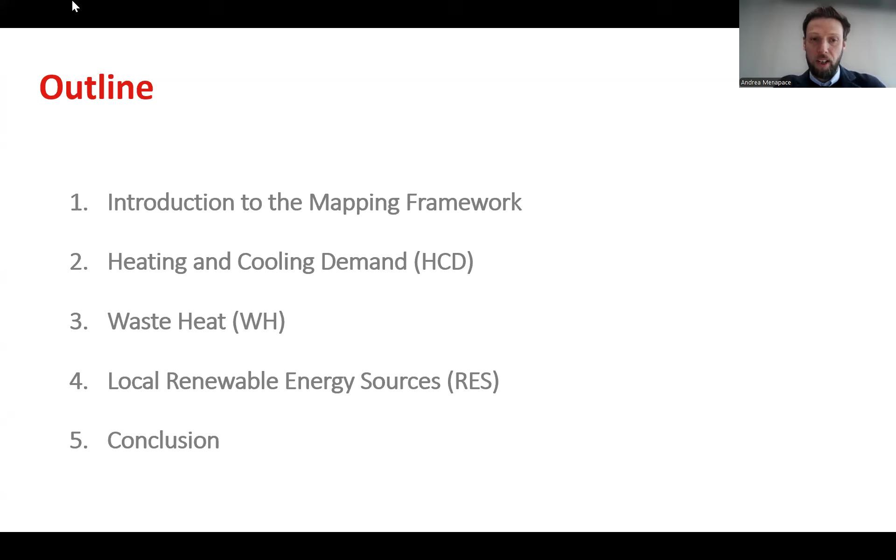Here we can see the outline of today's presentation. I will start with the context and motivation behind this framework, and introduce the overall structure of the tool. After that, I will move to the three core layers: heating and cooling demand, waste heat, and local renewable energy sources. Finally, I will summarize the main findings of the proposed mapping framework in the conclusion.

So let's start with a bit of context. District heating and cooling systems in Europe are undergoing a structural transformation. Under the revised Energy Efficiency Directive, we know that the definition of efficient district heating and cooling is progressively evolving according to an already defined path. In the short term, high efficient cogeneration plays a central role in meeting these efficiency targets. However, the regulatory trajectory is clearly shifting.

While combined heat and power remains relevant in the transition phase, the long-term targets increasingly prioritize renewable energy and waste heat integration. In fact, after 2040, high efficient cogeneration no longer counts as a standalone requirement, and compliance is primarily driven by renewable sources and recovered energy. This means that heating and cooling systems must progressively move from fossil and CHP supporting configurations towards supply structures dominated by renewable energy and waste heat.

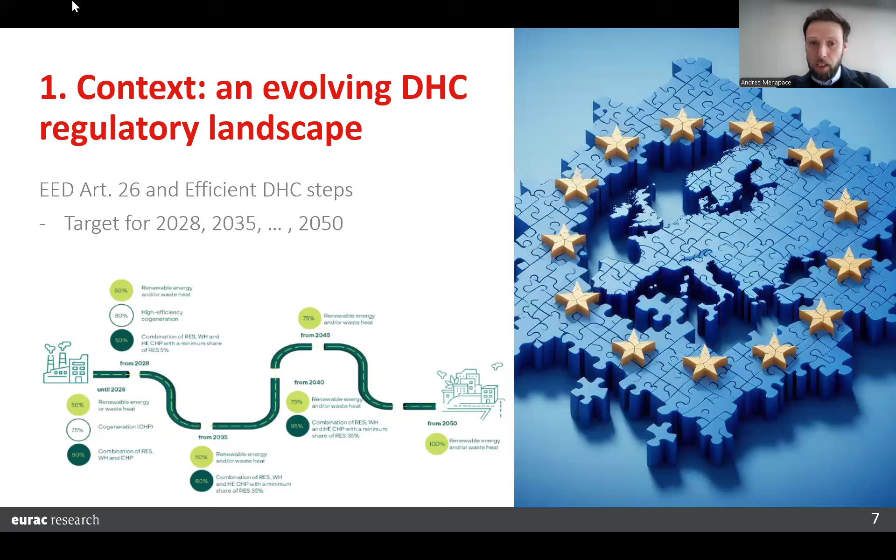This structural shift requires forward-looking and strategic planning, and this is the context in which the mapping framework has been developed.

These regulatory and strategic challenges are the main drivers behind the proposed framework. At the core, there is growing regulatory pressure to comply with the revised Energy Efficiency Directive, as previously said, and the Renewable Energy Directive too. Meeting these requirements is not only a matter of adapting a few parameters, it means addressing increasing technical and operational challenges as systems must progressively reach high efficiency and renewable energy thresholds.

At the same time, cities and operators are required to move towards strategic urban heating and cooling decarbonization planning. This implies a comprehensive transformation, meaning modernizing networks, integrating renewable energy and waste heat, improving production efficiency, and in many cases, expanding the network into new areas, looking for new opportunities in the urban context.

So effective decision making becomes critical. Planning cannot rely only on assumptions. It requires a structured and robust procedure, including systematic source mapping and assessment, district modeling, scenario analysis, feasibility study evaluation, and finally investment planning. All these steps depend on having a clear and quantitative understanding of the energy context in a defined area. That means the essential first step is the mapping. Identifying and characterizing the energy context provides the analytic foundation for the next steps.

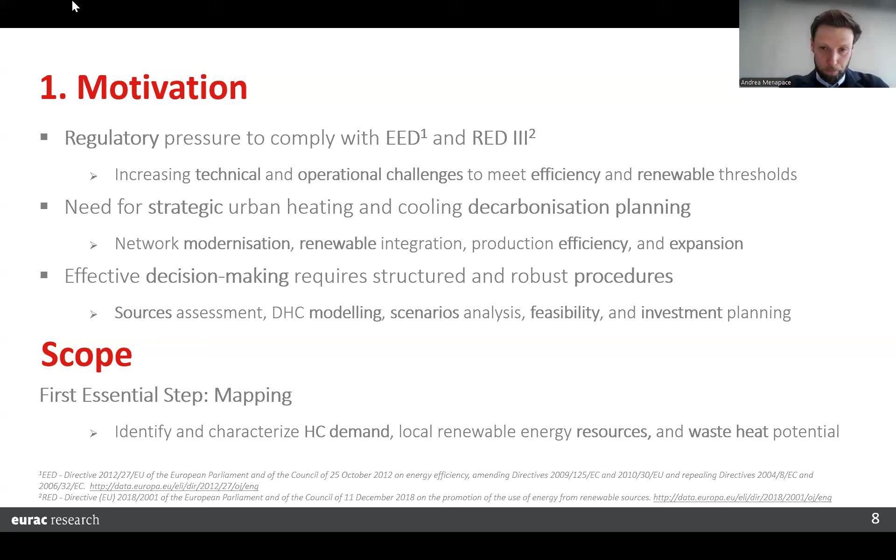So here you can have an overview about the 3 layers proposed in the GIS modeling framework. The approach relies on a structured GIS-based analysis to map the local energy context, providing an approximative estimation but comprehensive and quantitative screening of all the available options.

So the first layer is heat and cooling demand, to define the spatial distribution and the thermal load, both within the existing district system areas and also in potential expansion zones.

The second layer focuses on waste heat. Here we identify industrial and tertiary waste heat sources, characterize the energy potential, temperature level, and temporality to be considered for inclusion in district networks.

The third layer addresses local renewable energy sources, meaning mapping, for example, solar thermal and ground sources potential within the urban boundaries, analyzing both the available area in which we can install renewable sources and a rough estimation about the supply potential.

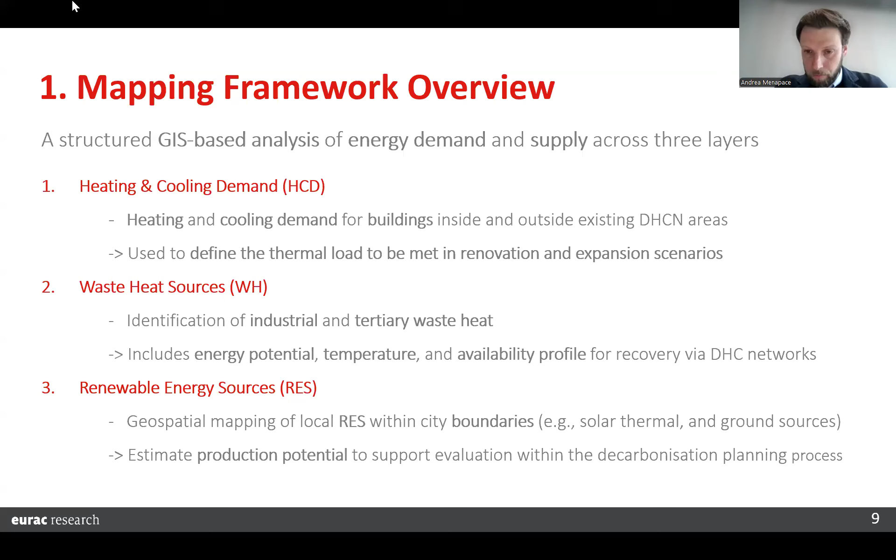Okay, so let's start from the first one, that is heating and cooling demand. The objective of this, of course, is mapping, but also characterizing from the temporal point of view the heating and cooling demand of the analyzed urban area.

We distinguish between residential and non-residential buildings, applying different energy density benchmarks in order to estimate the final yearly demand. The estimation combines different kinds of data that we can look at in detail later. So the result will be a spatio-temporal dataset at building level.

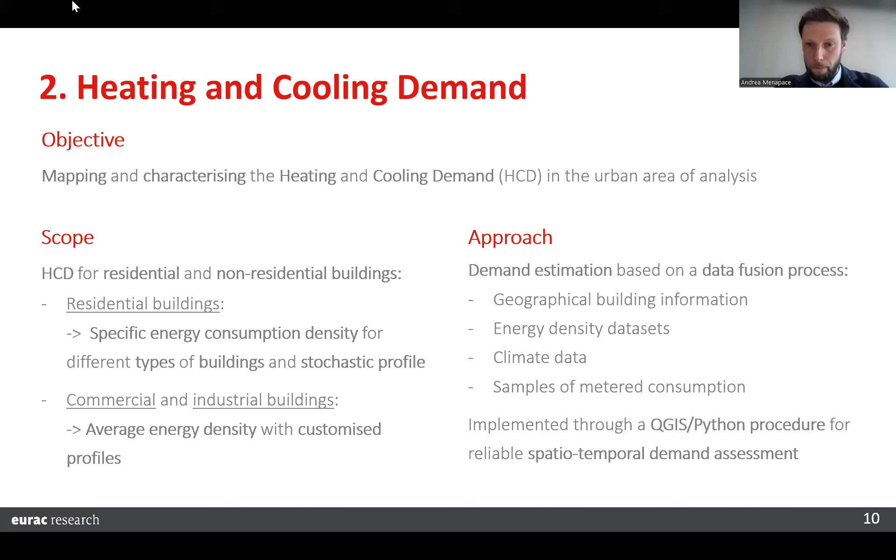I don't want to enter too much in detail, but just to give you an idea what are the required inputs for the estimation of the demand. So first are building characteristics, such as footprint area, number of floors, building use, type of buildings, and construction period. Second are the climate data, specifically temperature and solar radiation.

Third, we base our calculation on two energy density benchmarks that are derived from INSPIRE and from HotMaps for non-residential buildings. And finally, when available, we can include metered consumption data in order to refine our estimation and also the hourly profiles. On the right, you can see a simple example about the GIS inputs with the related table with the already mentioned information.

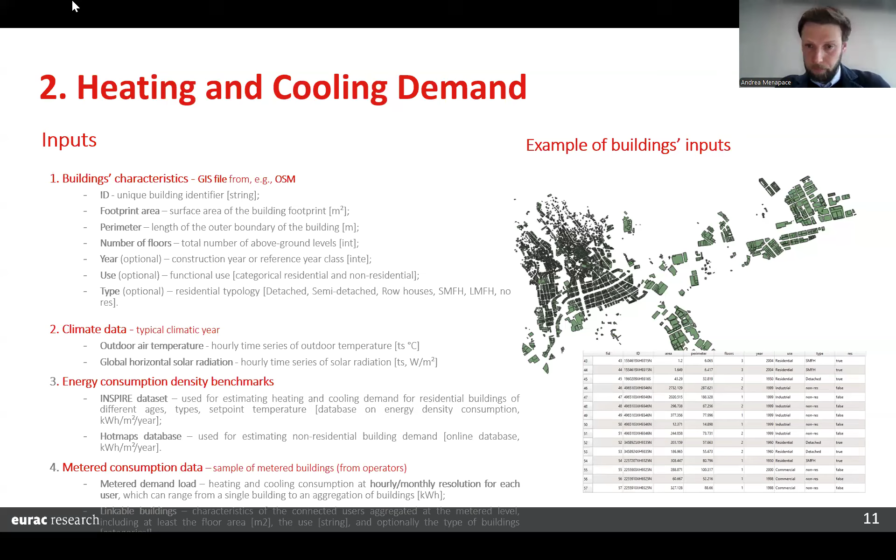Okay, so a bit about the calculation. Mainly we apply a two-step procedure in which first we calculate the annual heating and cooling demand at building level using a query of two databases: INSPIRE, in the case of residential buildings, in which we have as inputs climate zone, building typology, construction period, and set point temperature.

Instead for non-residential buildings, we use HotMaps density. Annual demand is defined this way, but we have a few correction factors that allow us to better refine the estimation according with the local context. For example, we can apply a bias correction on the net floor area, on the local climate condition using degree days, and when available, we can also use some metered data of a sample of buildings, for example, for calibration.

Second step is to reconstruct the hourly demand profile. That is, as you know, quite important to be used in simulation in order to have a better understanding about the system and how to implement the different sources to meet the demand profile.

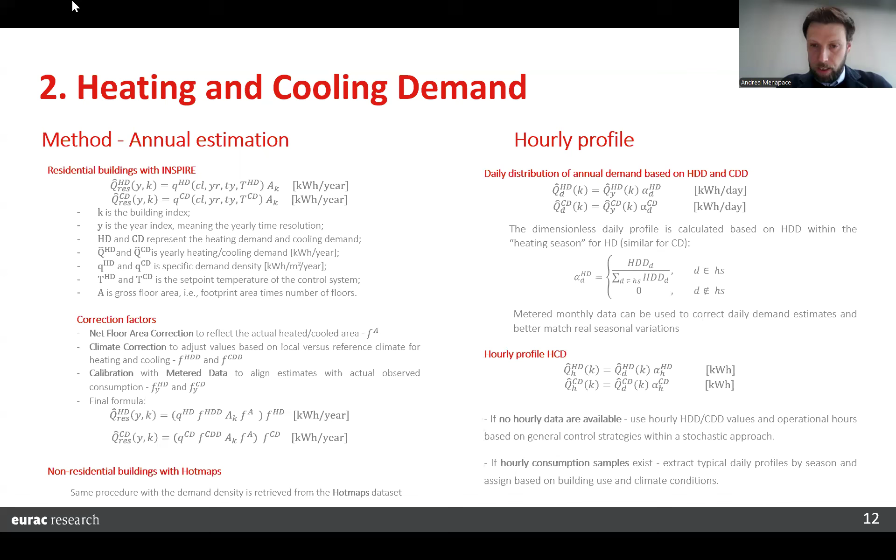These outputs are delivered in a structured GIS format file and are directly usable for creating scenarios with a dynamic model. In short, the demand mapping provides both spatial resolution and temporal detail, and although the results are model estimated, they offer a robust indication of local demand patterns, especially when calibrated with available measured data.

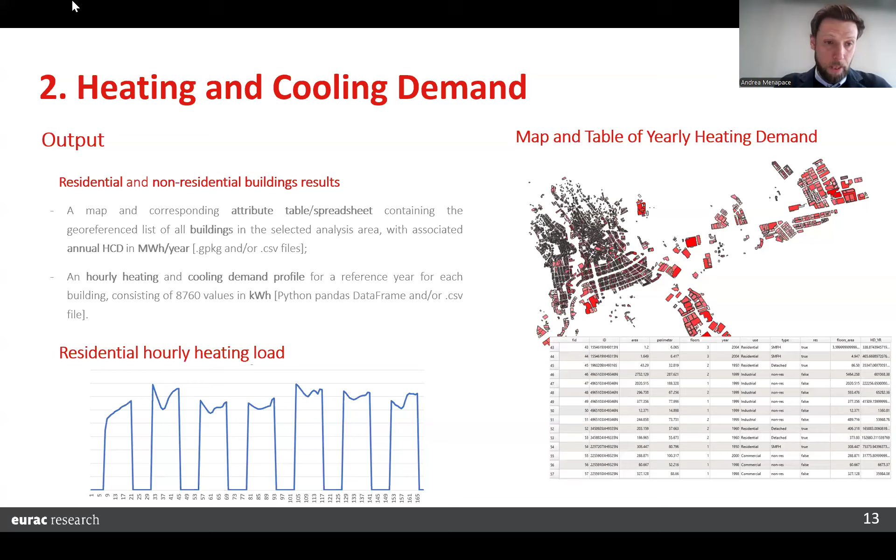Now, let's move on to the next layer.

The object is to map and estimate the waste heat potential within the area of interest. The methodology adopts two complementary perspectives: on one hand, industrial sources covering manufacturing activities such as dairy production or metal works, and many others; on the other hand, so-called urban sources, including tertiary activities like hospitals, supermarkets, swimming pools, ice rinks, data centers, and so on.

Industrial sources often provide medium and high temperature heat to recover. Instead, for tertiary activity, it's always low temperature heat to be recovered and then to be integrated by the use of heat pumps.

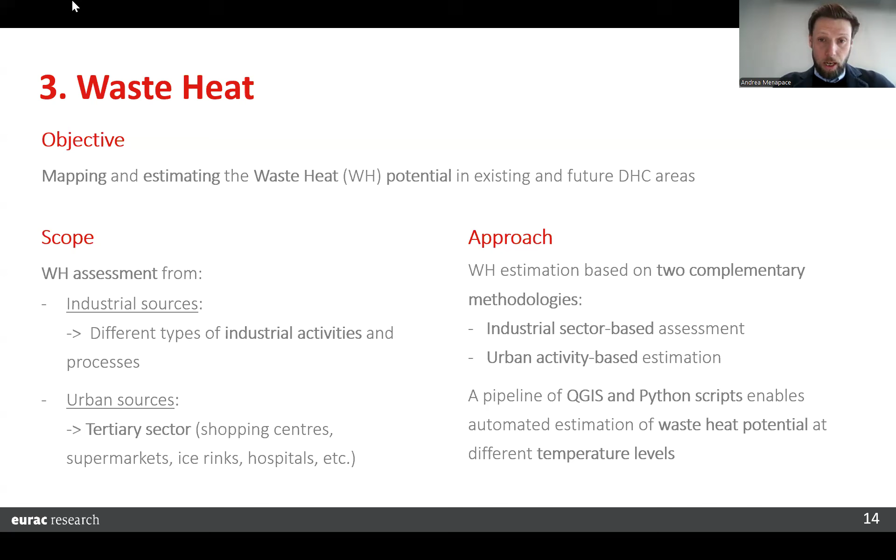Let's move to the inputs. Also in this case we have different kinds of inputs. I don't want to spend too much time, but just to highlight how our framework relies on easy to find information. For industrial sources, we start from a list of facilities typically provided by the Chamber of Commerce, including location, NACE code, and size expressed as number of employees. The NACE code is the European classification system for economic activities, and it's essential to be linked to different industrial processes that allow us to estimate the heat recovery factors. Sometimes the number of employees can be critical because one company can have more than one site in a city, so we need to take care about this potential technical issue.

This information is then combined with statistical data from the Danish reference database, which links industrial sector and size to waste heat amount at defining levels of temperature.

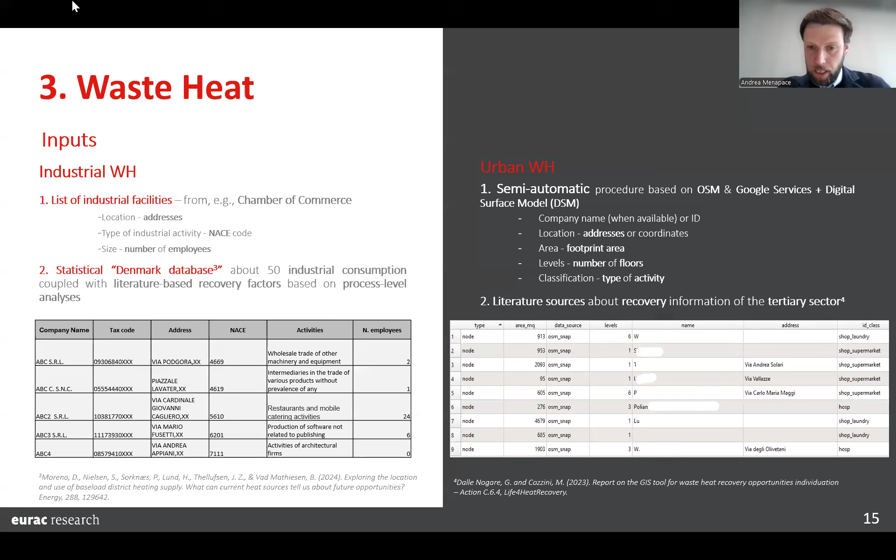So to sum up, both methods merge geospatial data with literature factors, and in the next slide we can see how we use this data to do our calculation.

On the left, for the industrial sector, we use the Danish reference database as said before, which links the sector with number of employees and provides the available waste heat at low, medium, and high temperature. Company size strongly influences the potential. We apply piecewise linear interpolation on the number of employees in order to have a more precise estimation about the available waste heat, not just per category, but with interpolation.

On the right, you can see the different method for urban sourcing. Here we focus on specific building categories, such as supermarkets or swimming pools. The waste heat potential is calculated based on building footprint, number of floors, and literature-based recovery coefficients. At the bottom, we can see an example of meat production, where waste heat increases with the size of the activity, shown for the three levels of temperature.

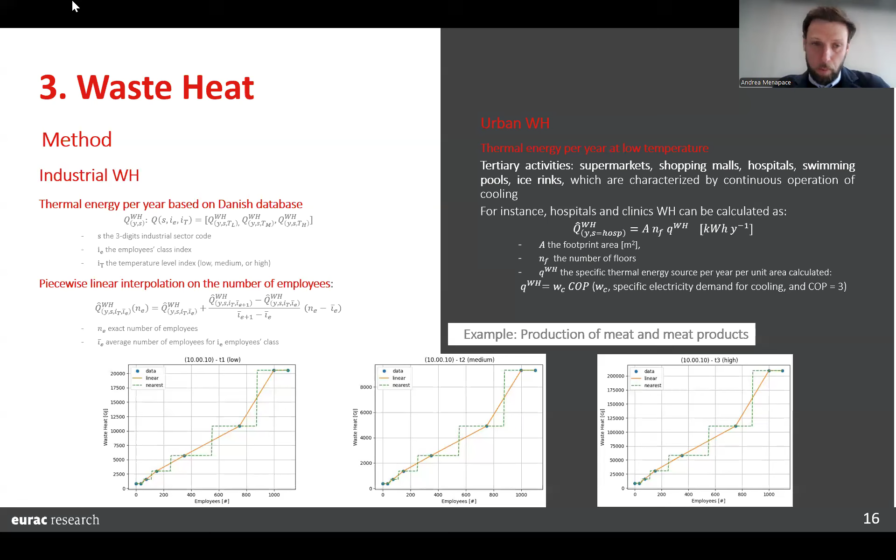In the next slide we can see an example of waste heat output.

The output of this process is, as you can see on the left, a map of industry and the potential heat recovery for each industry. Of course there are a lot of potential activities that need to be processed, and on the right you can see the screening we apply for a case study, in which, for example, we select a minimum threshold of 1 gigawatt-hour per year and a maximum distance from the existing network of less than 1 kilometer. This allows us to prioritize sources that are technically useful for integration into the district heating system.

In addition to thermal value, we also provide an hourly profile for each selected source, making the result usable for modeling purposes and scenario preparation. So also in this case, the outcome is not just a map, but, as for the demand, a structured database of spatial and temporal waste heat potential.

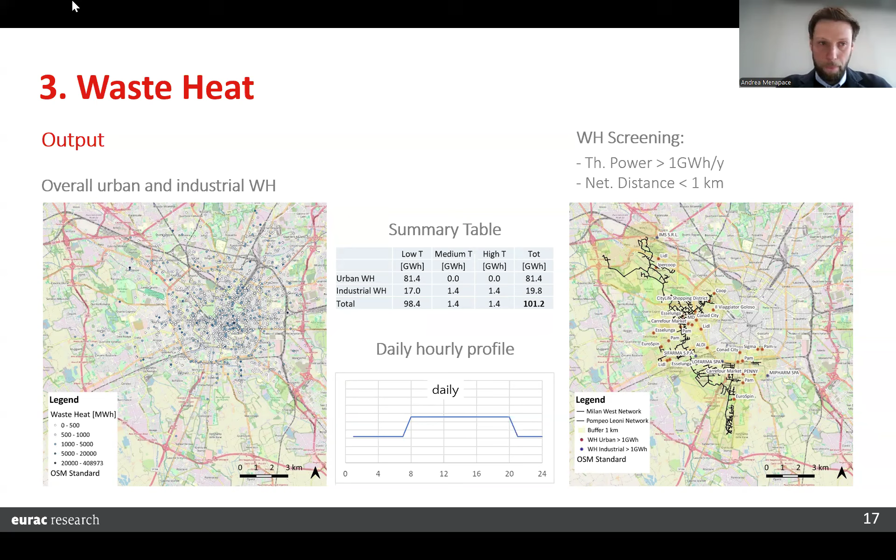Let's move on to the fourth layer, renewable energy. The objective here is to identify available areas and provide a preliminary quantification of the renewable heat sources that can be installed in those areas, and later to evaluate their integration into district heating or cooling networks.

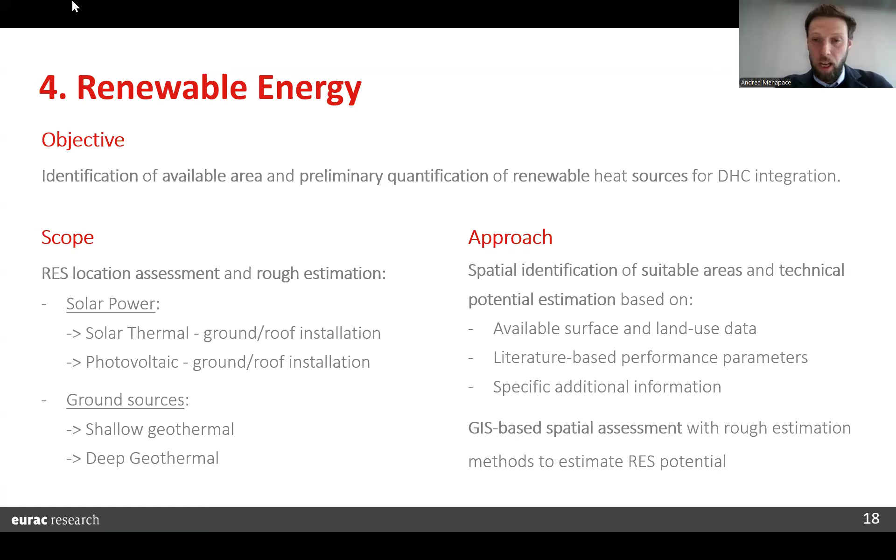In this case we focus on two main categories: solar thermal, considering both rooftop and ground-mounted installations, and ground sources, including shallow geothermal and deep geothermal if relevant. We first identify suitable areas, taking into account land use, constraints, and proximity to the existing network. We can estimate the technical potential using literature-based performance parameters and simplified engineering assumptions. The goal here is to obtain a spatially resolved quantification indication of the renewable potential available at the urban level.

Also in this case, I will propose the inputs of this analysis. We will not grab a lot of information because the purpose is to provide broad information for the planning, to be deepened later if necessary.

First, the geographical definition of the site is needed, including the existing and potential district areas. It's important to know also where the existing network is located.

Second, available installation surfaces that are defined through the GIS calculation using OpenStreetMap and/or Urban Atlas, to filter and exclude protected or restricted zones. The idea is to define a few areas of interest on which to calculate the available potential installation of some sort of renewable energy plant, to be later taken into account in the planning process.

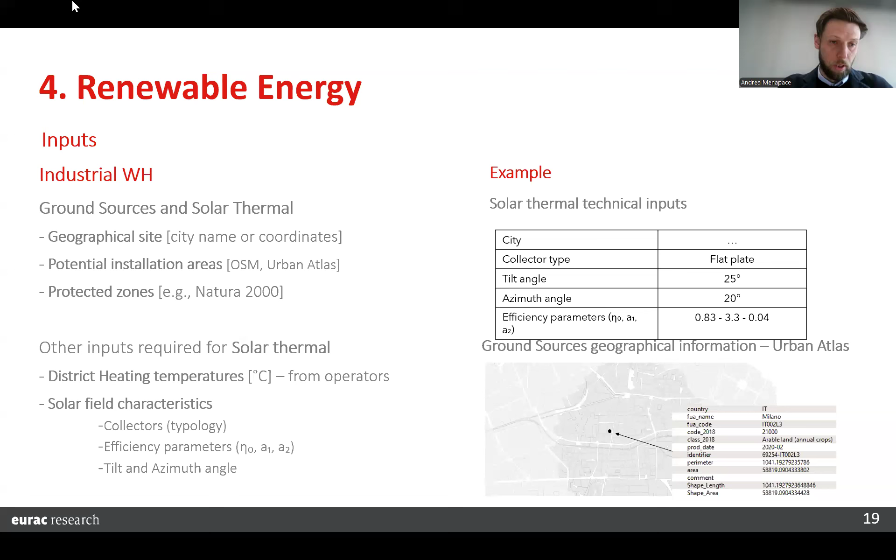I would like to move now to the method. For time reasons, I will focus only on the ground source example, just to give an idea how the methodological logic applies to the renewable energy mapping layer.

I would like to stress that in this case it's really a rough estimation, intended as a first level technical assessment that provides just an order of magnitude of the potential. In case of interest from the operators to include those sources in the decarbonization scenarios, they need to be better investigated.

So methodology in this case starts with the identification of suitable areas, mainly not-built zones and available urban areas, excluding of course any restricted areas.

Then we estimate the available water flow of, for example, an aquifer well, based on a specific extraction rate per unit surface. From that, we calculate the thermal power at the source side using standard thermodynamic relations. And of course, if the temperature level is low, we can also do a calculation including a heat pump in order to have the final available thermal power.

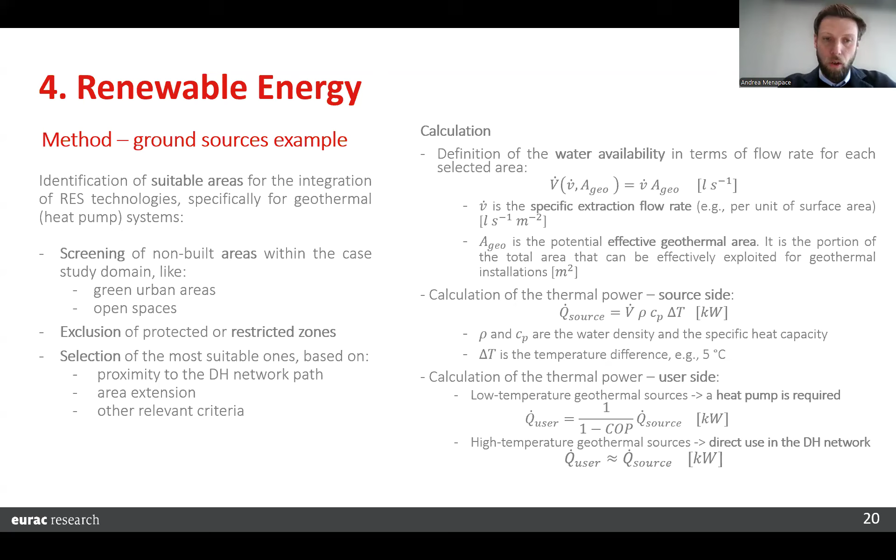I'm close to the end. Okay, here it is the final slide.

To conclude, the mapping framework acts as a strategic planning tool for district heating and cooling decarbonization. It provides a structured GIS-based assessment of both demand and supply, integrating three key layers: heating and cooling demand, waste heat, and renewable energy sources.

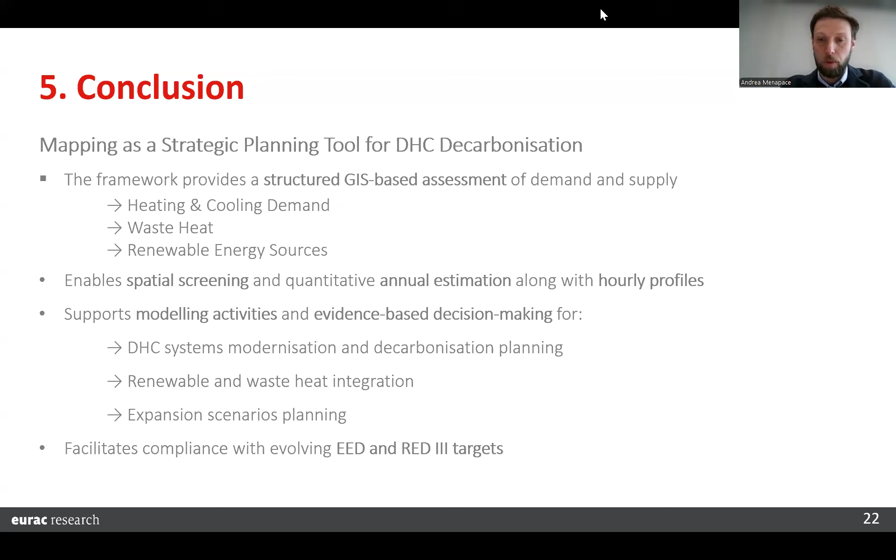At the same time, it facilitates alignment with the evolving directive, and in short, this is what the framework can provide. So an important support, in my opinion, for the decarbonization strategy, even if a first step, of course.

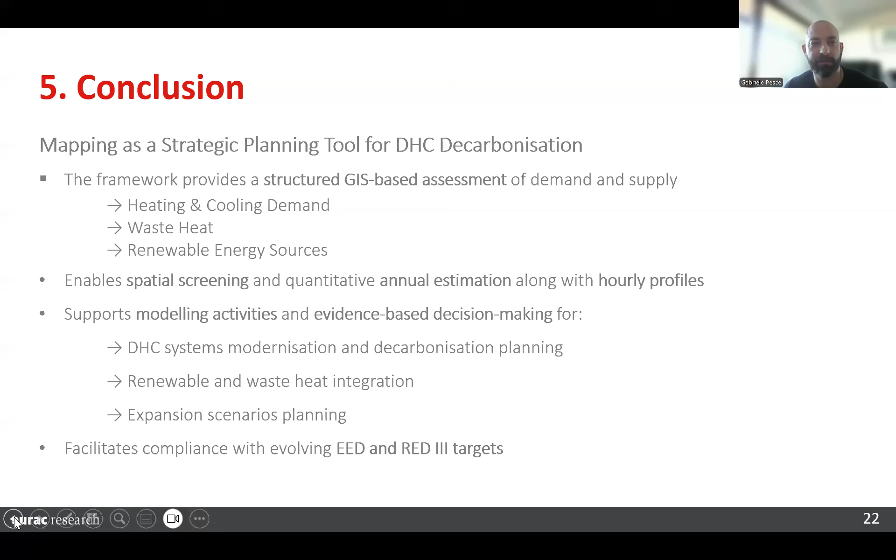Concerning that, Andrea, do you have a slide where we have your email contact? Yeah, the last slide has all my contacts. Can we go back so people can write it down? I cannot right now—Marietta, can you go back? No, it's not a slide, there's just a link. In the PDF version you'll find the connection, but not here. I can put it in the chat if possible. Yes please, thank you very much.

Perfect, thank you, so people can see it. Okay, waiting hopefully for other questions. I still have some. So Andrea,

From screening to bankability, I think it's a very important topic. We saw that the framework enables spatial screening and annual hourly estimation, but at what point does this move from strategic planning to something bankable? What additional validation steps are required before operators can rely on it for CapEx decisions? If I'm clear—yeah, a clear question.